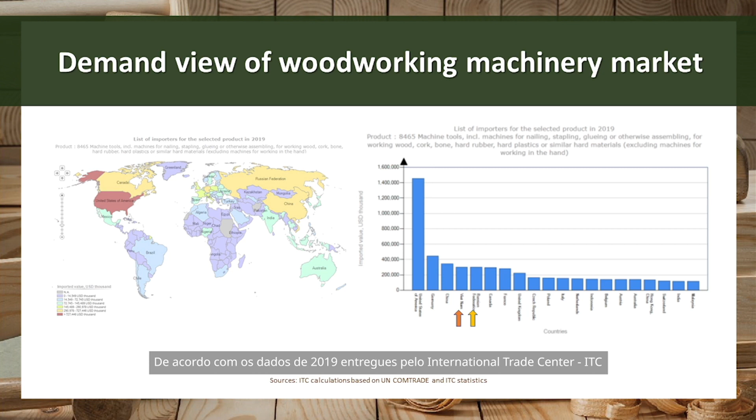Since Wood Taiwan is dedicated to promoting global woodworking machinery, it is very important to know who buys machines. According to the International Trade Center, ITC's data in 2019, USA bought more than $1.4 billion, standing as the world's largest importer, followed by Germany and China. Emerging markets Vietnam and Russia were ranked number 4 and number 5.

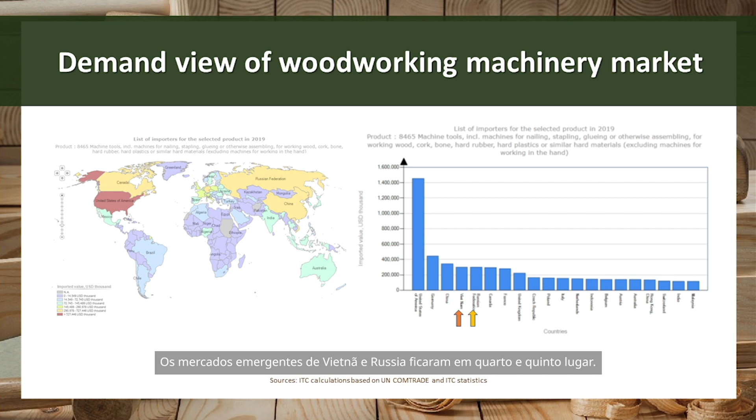On the other hand, when we examine the supplying side, Germany pops up to take the lead with exports of $2 billion, followed by China and Italy. And Taiwan was the number 4 supplier of worldwide woodworking machinery. In 2020, Taiwan shipped $700 million more.

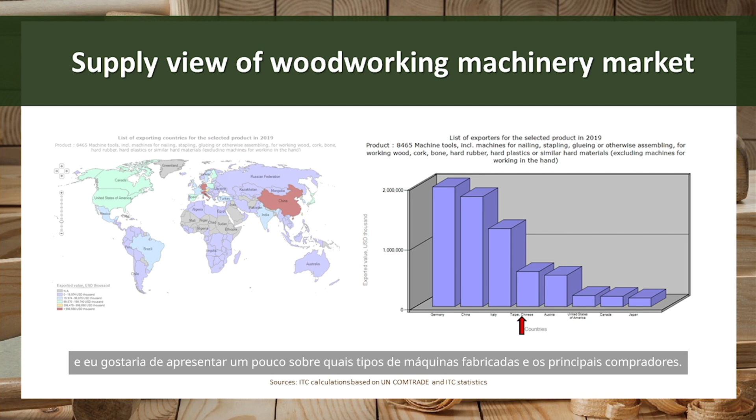You might ask, what makes us different from others? The main reason is we tailor machines according to customers' needs. Taiwan's machines enjoy a good reputation of high quality, reliability, and quick response to customers' demands after their sales.

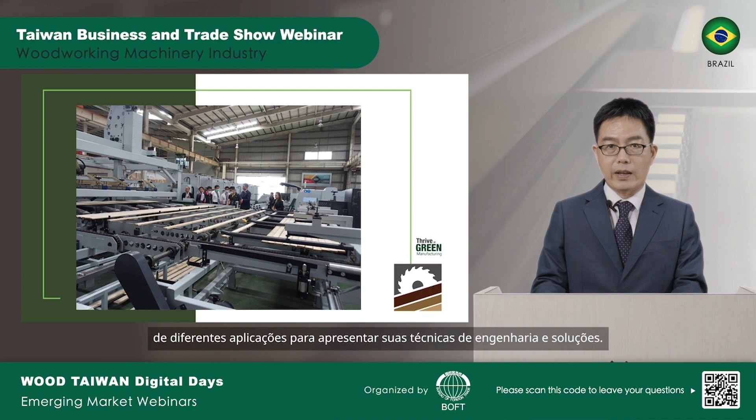In this webinar series, we've invited heavyweight machine makers from different applications, presenting their engineering crafts and solutions. Wood Taiwan is a perfect venue for you to explore the cutting-edge machines.

In the last exhibition 3 years ago, we had 167 exhibitors using 1,076 booths, showcasing their best products and know-hows, attracted more than 900 buyers from the globe and nearly 5,300 domestic professionals to network with their counterparts.

The coming Wood Taiwan will be staged at TaiNEX 1. We look forward to your visit next year in Taipei. Thank you.

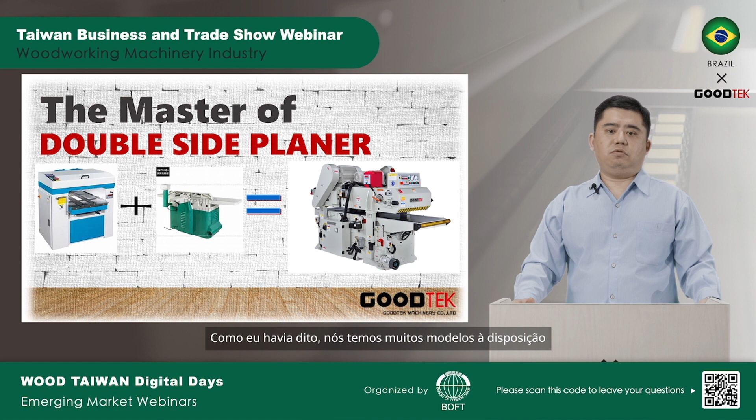Like I told you, we have many models for you to choose. Now I will introduce our full models for you. Those you can see, that is our 400 models.

The special one is the medium, GT400S. It can plane only 100 millimeters length of wood. Besides, it has a synchronized conveyor table. This equipment is better for the operator to feed the short material. Now this equipment is optional for all models, not only for GT400S. More and more customers prefer this function because it's convenient.

GT400B is our standard model. It can plane 250 millimeters length of wood. If you are first time to use a double-side planer, GT400B can be your best choice.

You can see those are 610 and 635 series models. The special one is the medium, HS635ARD. It is our high-speed model. The normal feeding speed is 24 meters per minute, but HS635ARD can go up to 40.

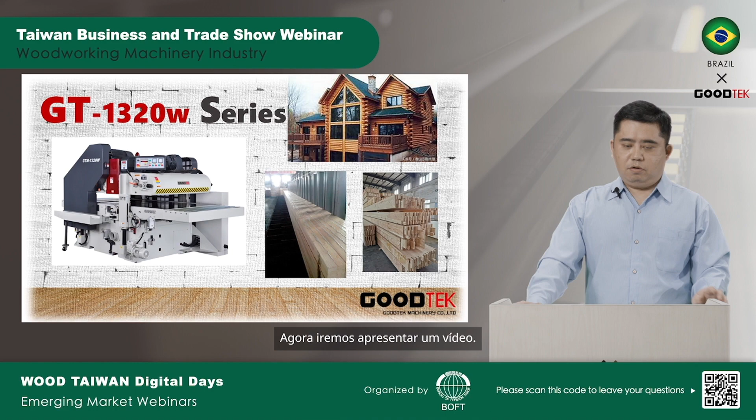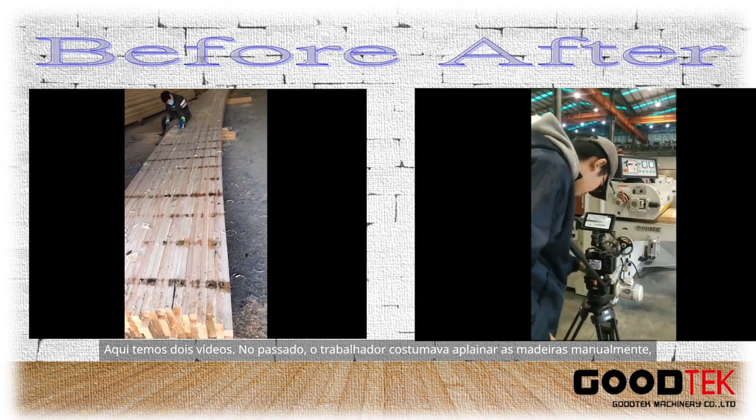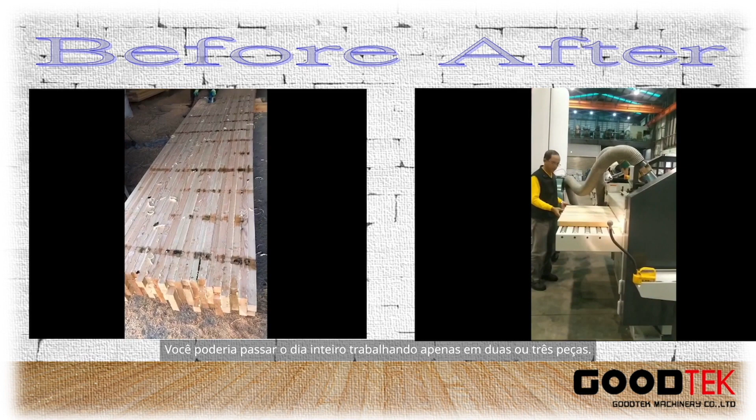You can see those are two videos. In the past, the worker usually planed a huge piece of wood manually. It costs a lot of time, human labor, and efficiency. Perhaps you would spend one day just to produce 2 or 3 pieces, and the quality of the work is not good either.

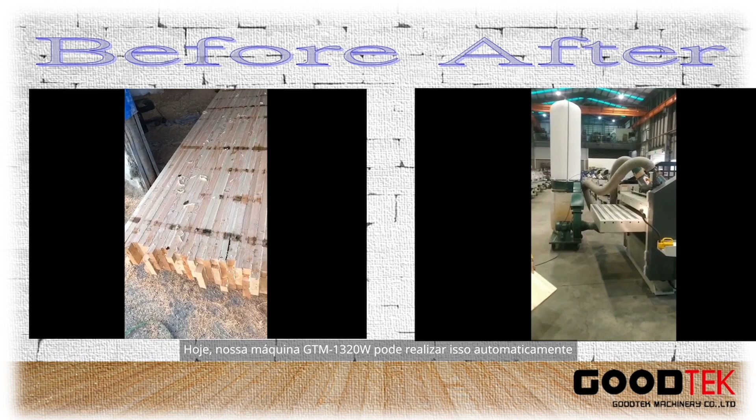Now our GTM-1320W can do this job automatically. You don't need to spend much time and human labor in the process. It saves more cost and makes more profit.

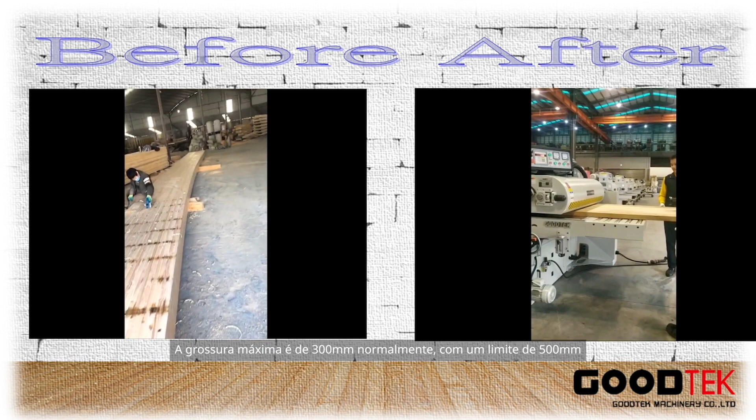For this model, the maximum width is 1,320 millimeters. The maximum thickness is 300 millimeters as standard, but we can go up to 500 as an option.

Now I am very proud to show you the demonstration video about our company and what our double-side planer can do for you. You can see our company is located in Taichung City, the center of Taiwan.

You can see this is our office. We have 30 employees in our office, our company.

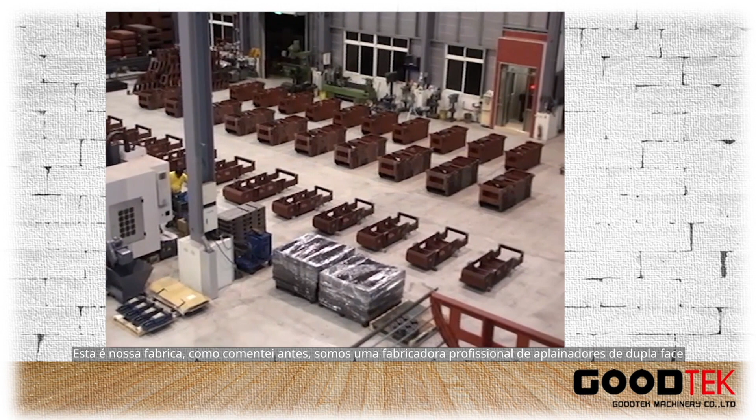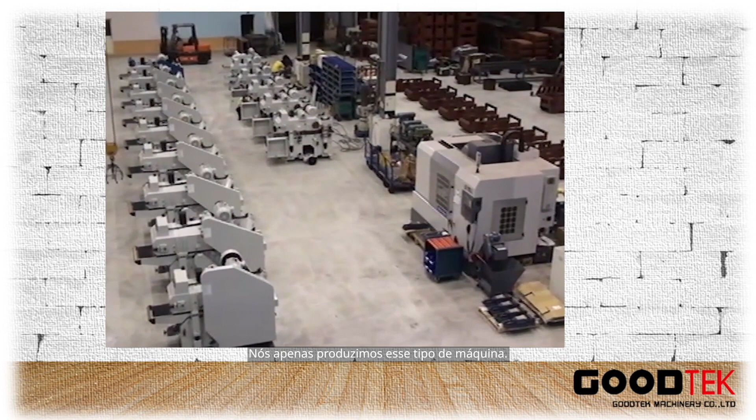You can see this is our factory. I told you before, we are a professional manufacturer for double-side planers, so we only produce this kind of machine, no other machines. We can produce 400 to 500 machines a year.

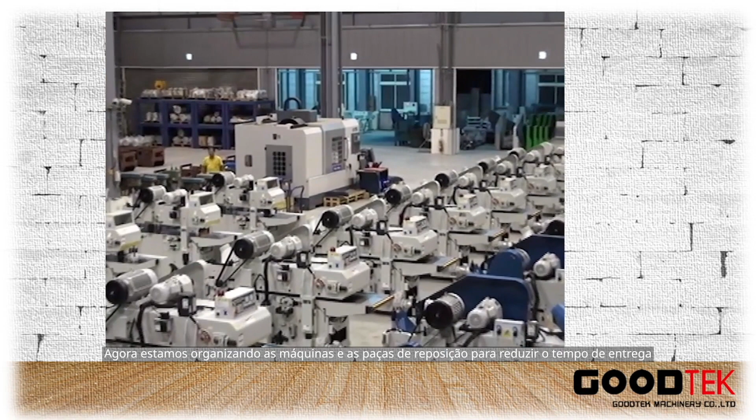Now we are trying to organize our machine and spare parts inventory. We try to reduce the delivery time of our products. The lead time for the machine is only 20 days, and for spare parts, it's only 1 day.

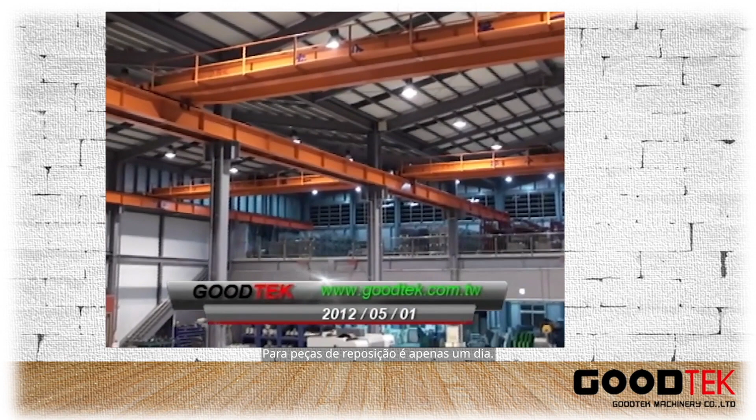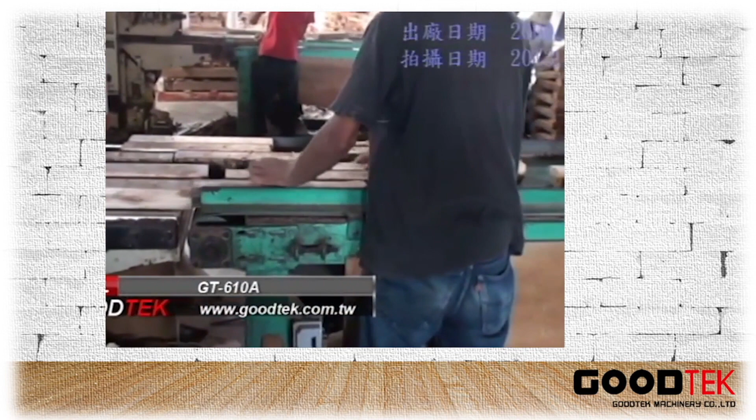Okay, you can see this is a factory in Indonesia. The model is GT-610A.

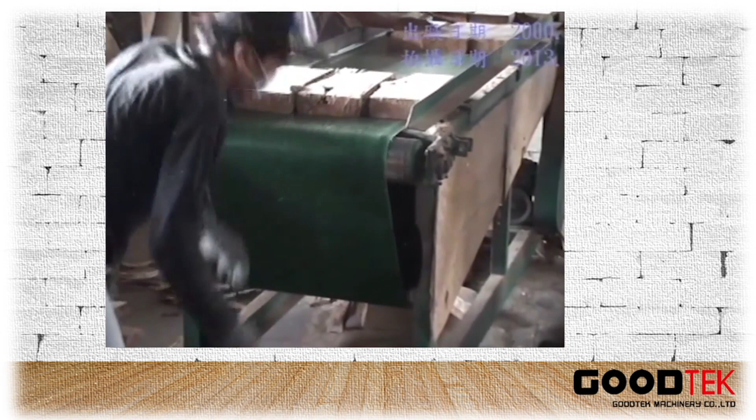You can see this factory has more than 10 machines of Goodtek planer. Their production is very huge. For the double-side planer, you can put several pieces in one pass.

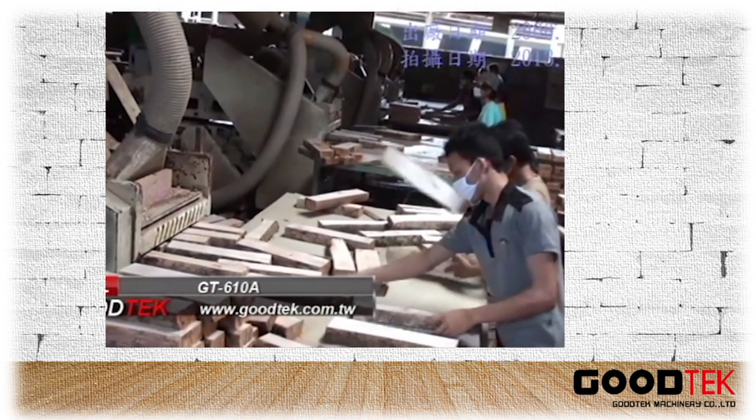Okay, you can see this is the final product.

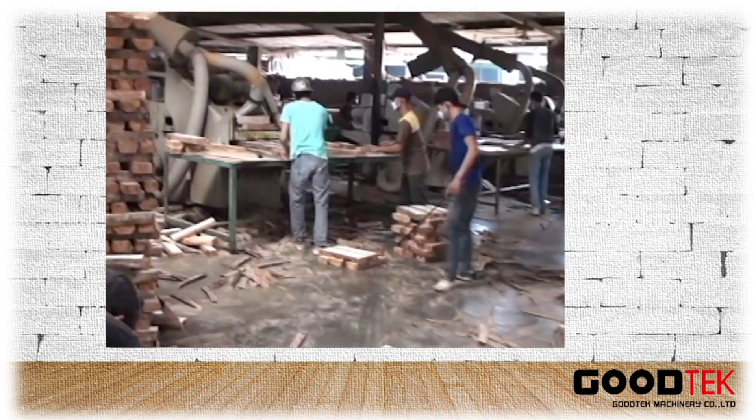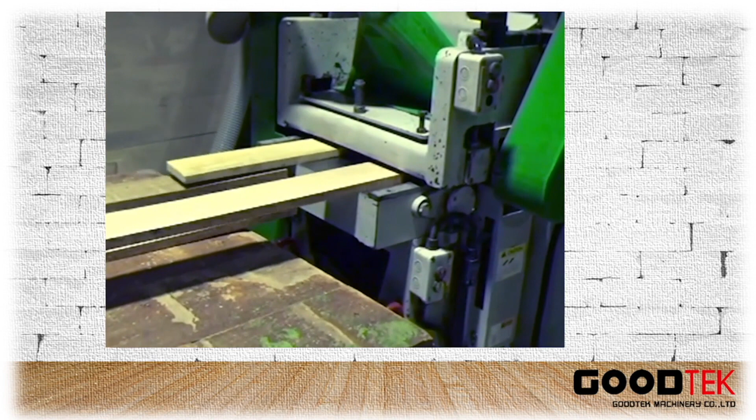Okay, this factory is in Thailand. Now it's planing the top and bottom surface. Now it's planing the left and right surface.

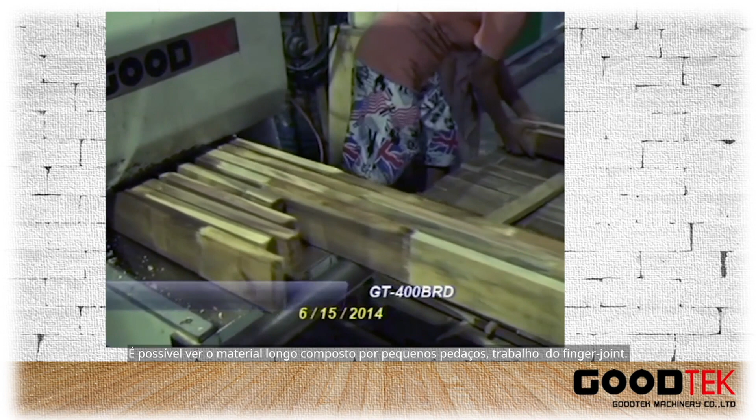You can see the raw material is composed of small pieces joined together by using a finger jointer machine.

Thank you for your time and watching. If you want to buy a double side planer, you can choose Goodtek Machinery. Thank you.

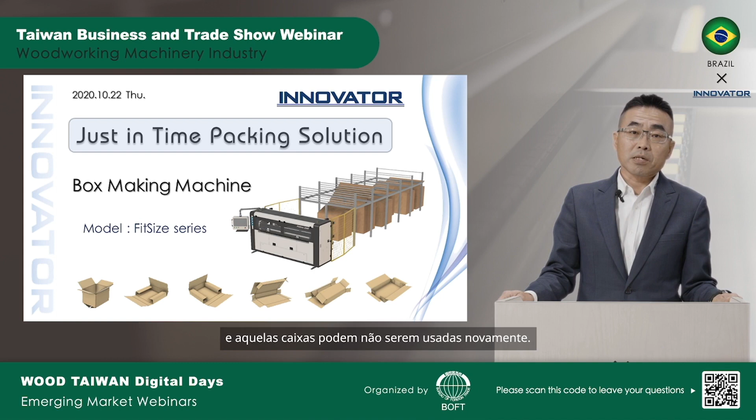So what is the just-in-time packing solution? Oftentimes when we visit customers, we see they have a lot of waste boxes in their warehouse, and those boxes may not be used again anymore. So the advantage we are trying to provide is that with these box making machines, we can make any size, any box style, at any time, in an easy and more efficient way.

And you will be able to stop wasting money and time on inventory boxes. In a way, you can also reduce the number of staff needed to check and locate these boxes as you need them.

We also can help you reduce the cost of fillers, like peanuts and air pillows, so you don't have to ship a lot of air when you do logistics on your trucks. So we can carry the content to the customer safe and sound by minimizing shipping cost.

And we also can help you lessen the shipping cost by reducing the necessary filler. As a result, it creates a better environment for our kids by fitting more boxes onto trucks and airplanes.

So considering all the benefits of our box machines, you are able to produce fit-size boxes in an easy and efficient way. So here I would like to show you videos which will help you understand how the machine works and how it can function.

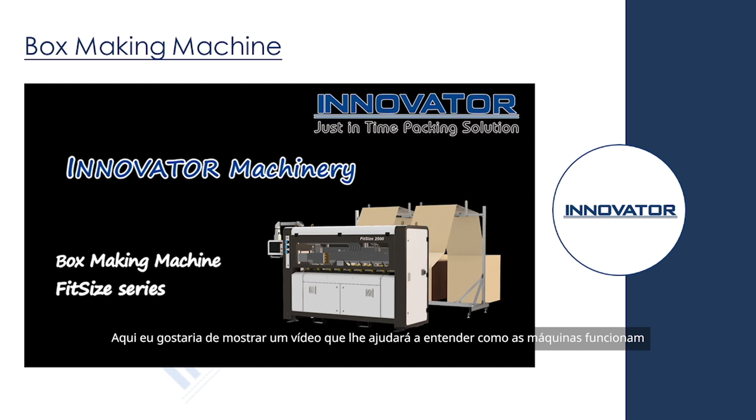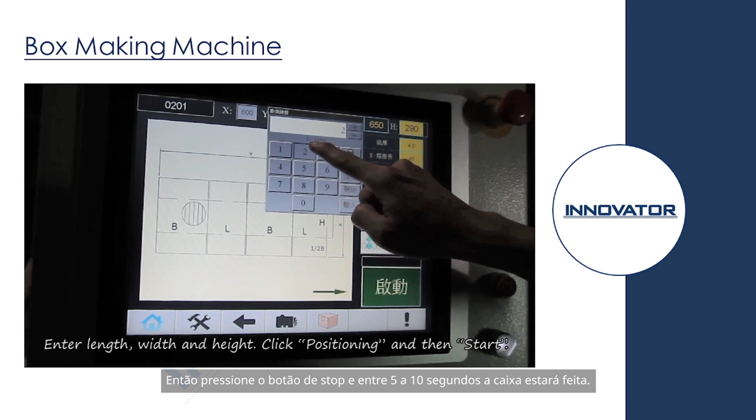So you can simply punch in the length, width, and height of the box you want to make. Then you just punch the start button, and within 5 to 10 seconds, the machine will make the boxes for you.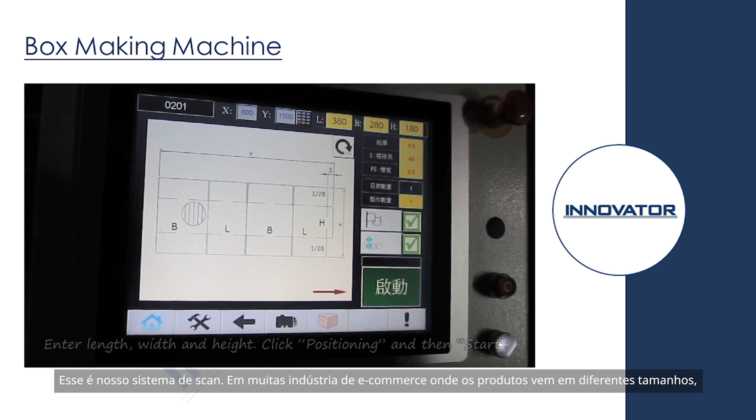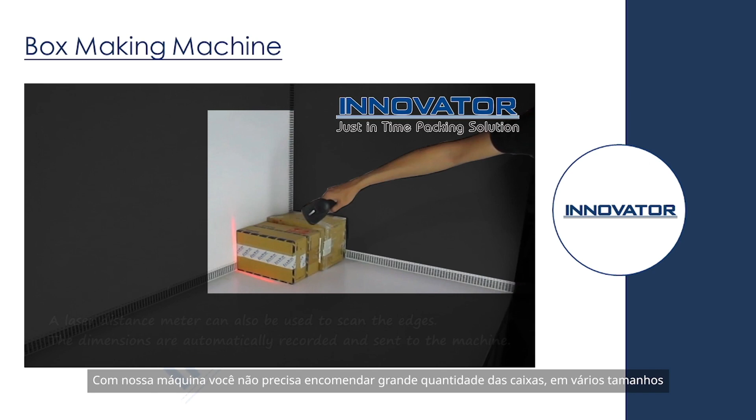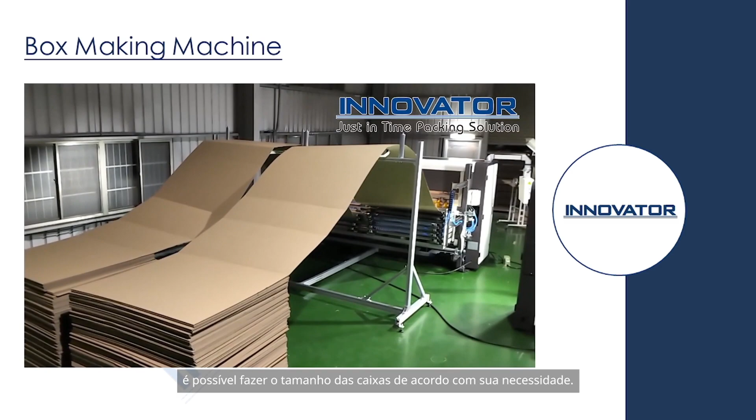This is our scanning measurement system. In a lot of e-commerce industries, where you want to pack contents that come in different sizes, you don't need to order a huge quantity of boxes. With our machines, you are able to make the box size just right to fit the content you are planning to ship. So let's get into a little more detail about the machines.

As you can see on the PowerPoint here, we have the infeed rollers and also the outfeed rollers. By standard, we are offering 1 crosswise cutting unit, 6 longitudinal cutting units, and the creasers.

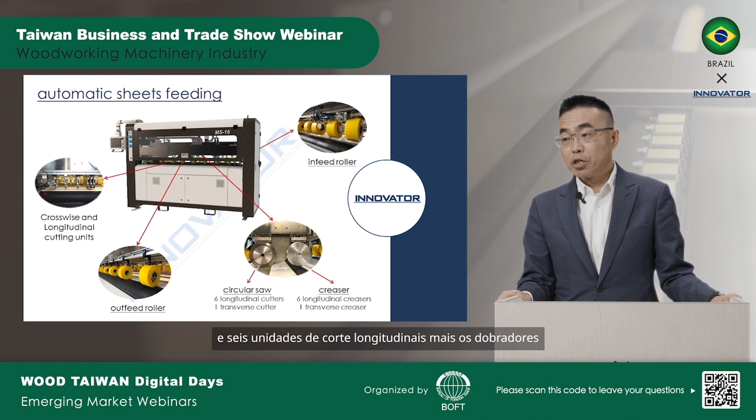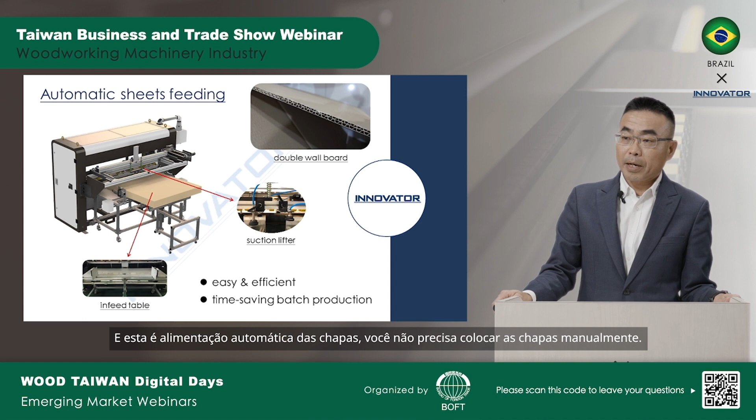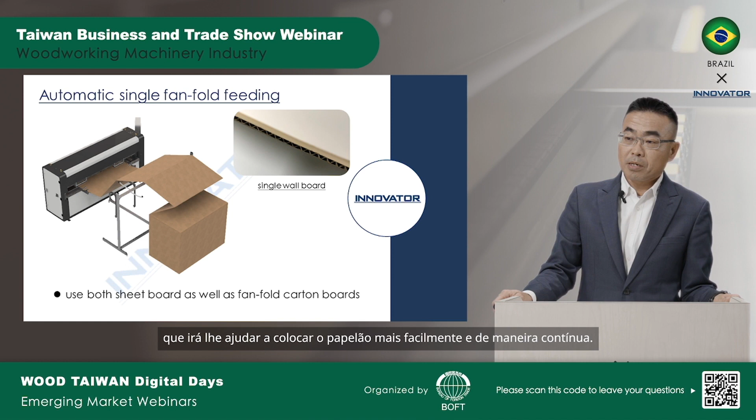This is the sheet feeding, automatic sheet feeding zone, and you don't have to feed the carton manually with your workers. You can also use what we call the fan-fold feeding system, which helps you feed the carton paper more easily and in a continuous way.

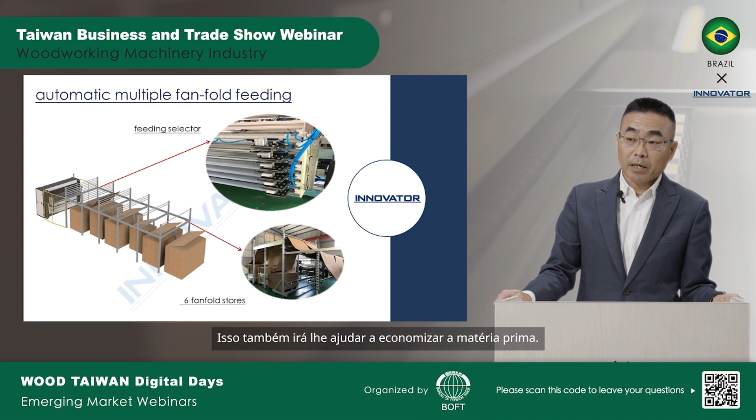You can also have what we call the side-by-side feeding system. You can have two different widths of corrugated cartons to maximize the yield of your raw materials. We can also do a maximum of 6 fanfold stores, and with our side-by-side feeding system, you can have a maximum of 12 different widths of corrugated raw materials. This will help you save a lot on your raw materials.

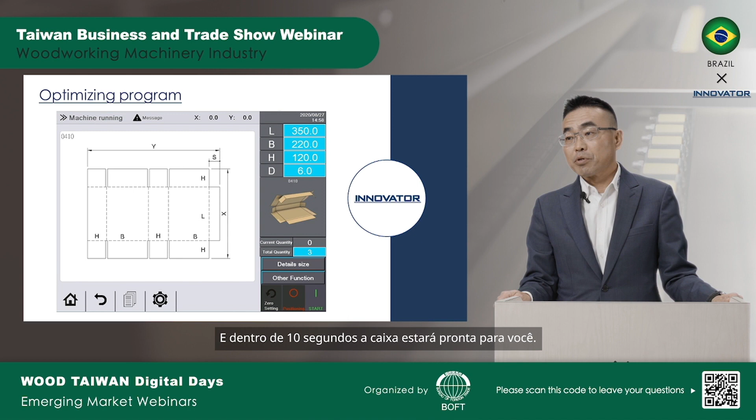So let's get into the program part of our machines. From the slides here, you can easily see there are several box styles you can choose from. Once you choose the box style, the next thing you have to do is punch in 3 numbers: the length, width, and height of your box. Within 10 seconds, the box is ready for you.

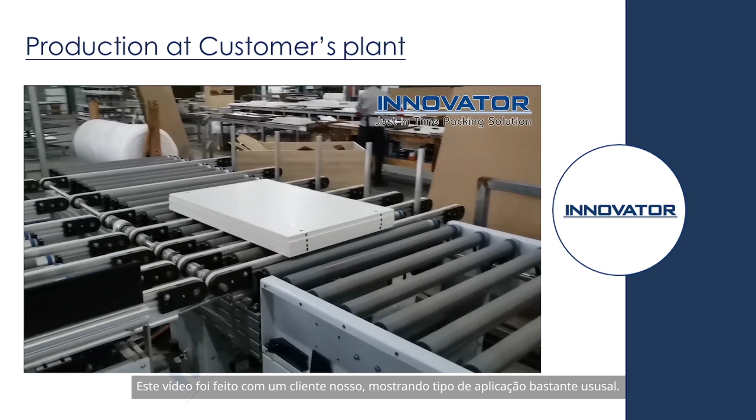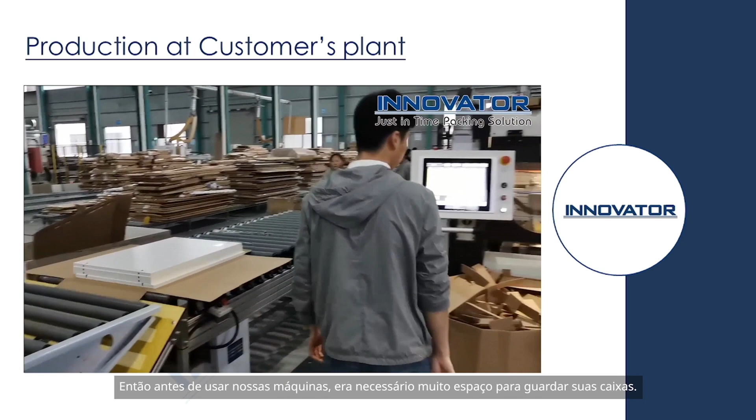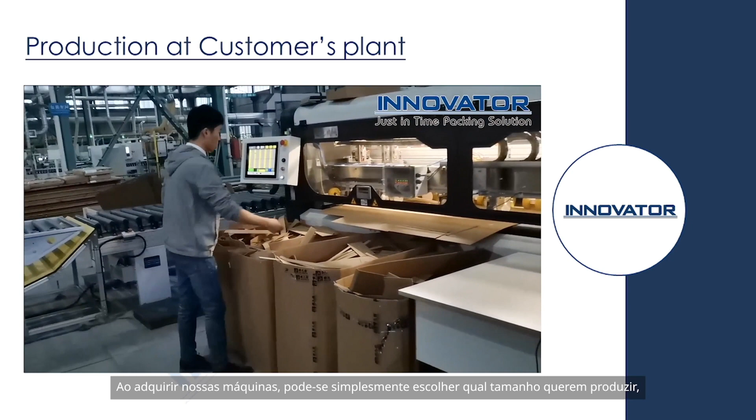This video was taken from one of our customers, typical panel furniture producers. Each panel they produce comes in a different size. Before using our machines, they needed a huge amount of space and had to order a huge quantity of boxes, which took up a lot of their warehouse space. Now, with our machines, they are able to pack whatever size panel they produce in a very easy and clean way.

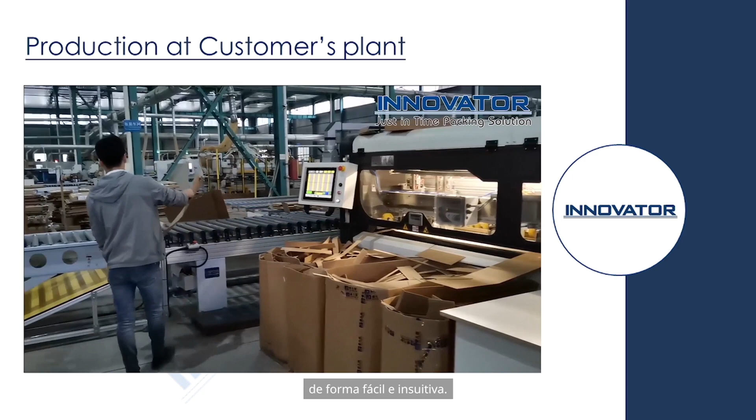The applications of this box-making machine can be various. It can be used by door manufacturers and for many different furniture packaging applications, like chairs or different sizes of couches and sofas. In this way, it will help you reduce shipping costs and help you manage your warehouse.

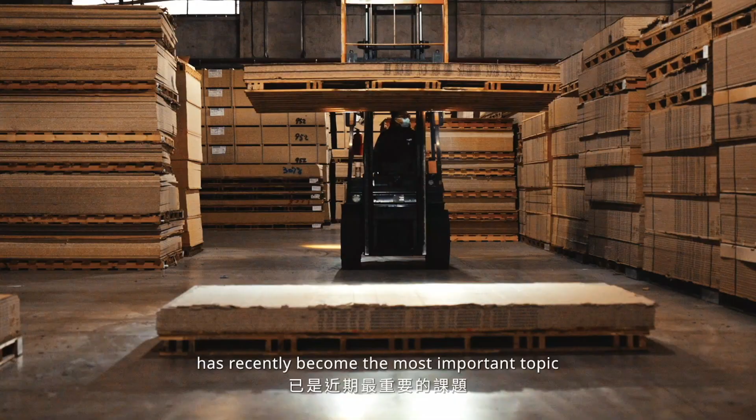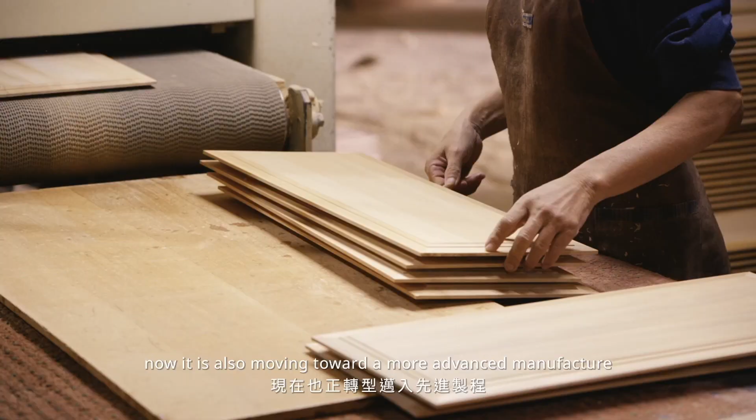Nature is the fundamental source for our human society and for all living beings. How to reach a balance and be able to live with our nature has recently become the most important topic. Same for the woodworking industry, serving as the initial material in industrialization. Now, it is also moving toward a more advanced manufacture and aim for an efficient utilization of wood, higher precision with less waste, and a greener production.

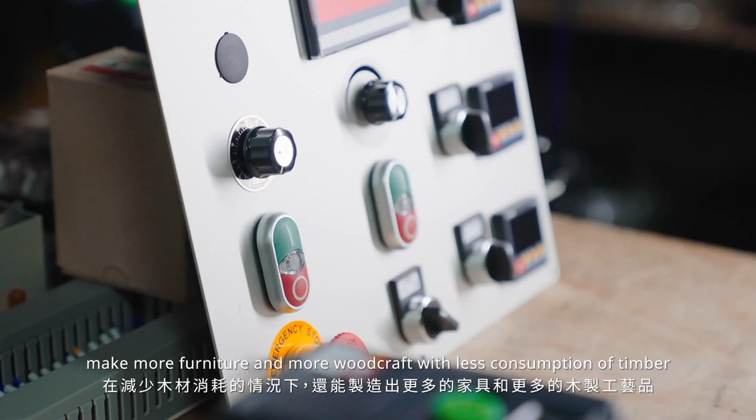We are trying to develop a new technology to help our customer make more furniture and more woodcraft with less consumption of timber. So only a smart machine can solve the problem. We would like to make the machine different from the global market.

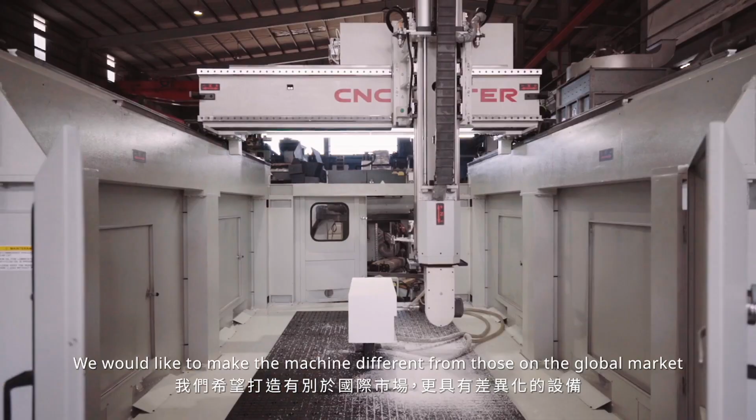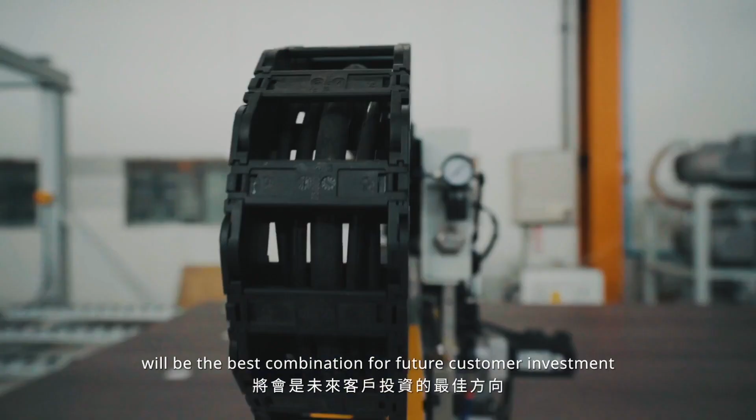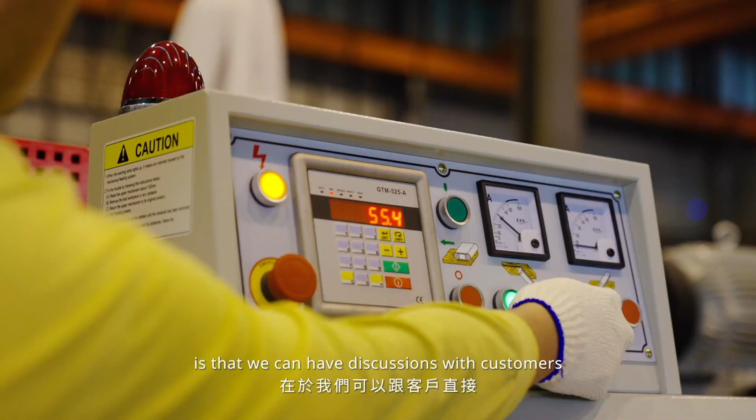From the perspective of the current market trends, a flexible capability of the production system will be the best combination for the future customer investment. It's a good opportunity for all customers to see different kinds of woodworking machines in the Wood Taiwan show. We think the advantage of physical exhibitions is that we can have discussions with customers about their needs and requirements.

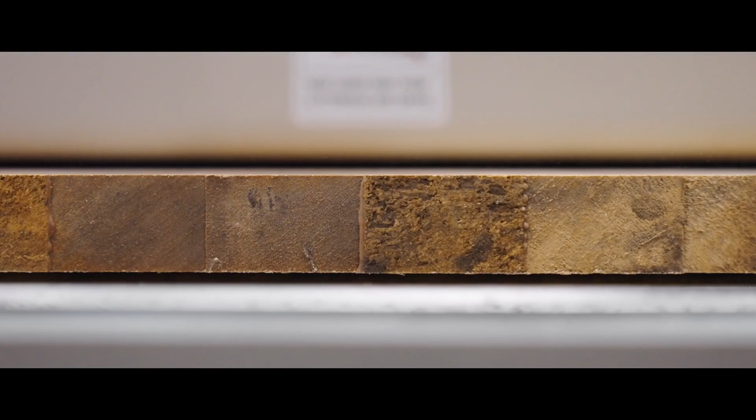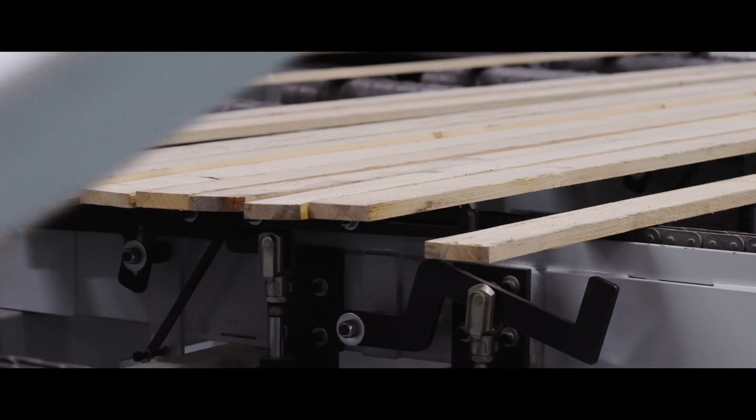Taiwanese manufacturing is very strong on the product. Taiwanese companies focus on manufacturing the machine; they lack professional skill in some areas, so whenever a customer has a special need, we can modify it for them. This is also our advantage.

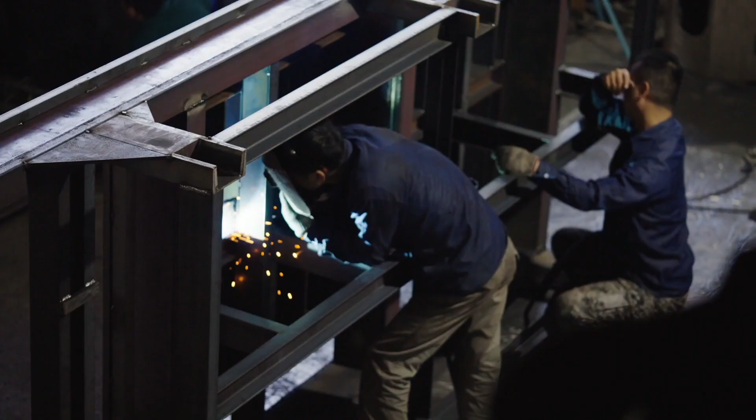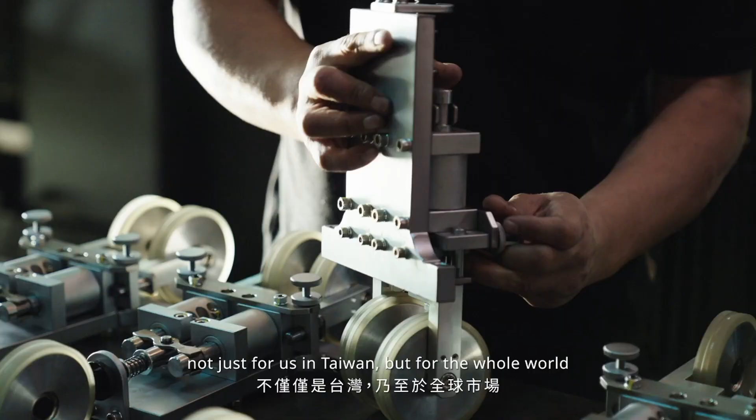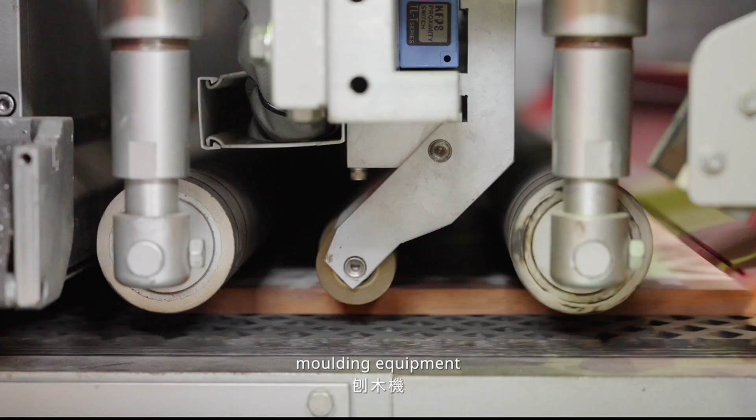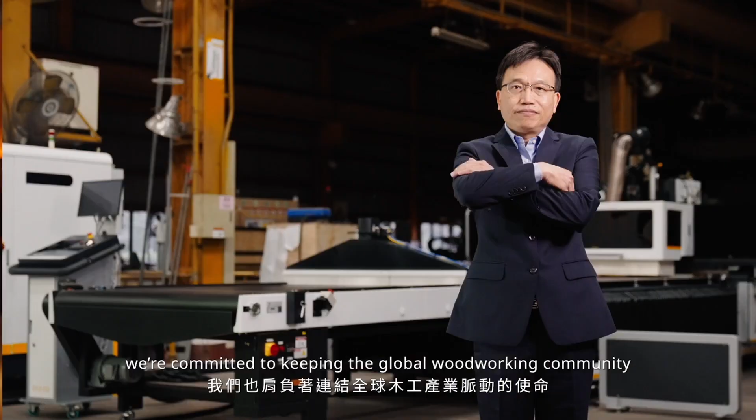2020 has been a challenging year, and the woodworking industry, not just for us in Taiwan but for the whole world, continues to adapt in 2021. Ranking as the fourth largest exporter for global woodworking machinery, Taiwan has been a major producer of reliable sawing machines, moulding equipment, sanding machines, jointers, and tenoning machines. At Wood Taiwan, we are committed to keeping the global woodworking community connected and informed, with the ultimate ambition to shape the future of green manufacturing.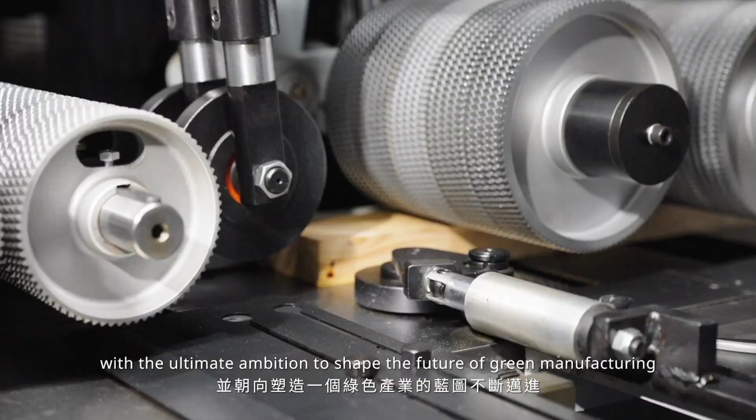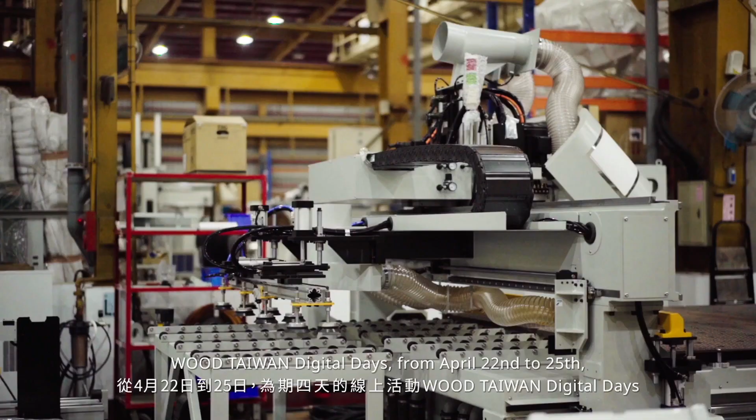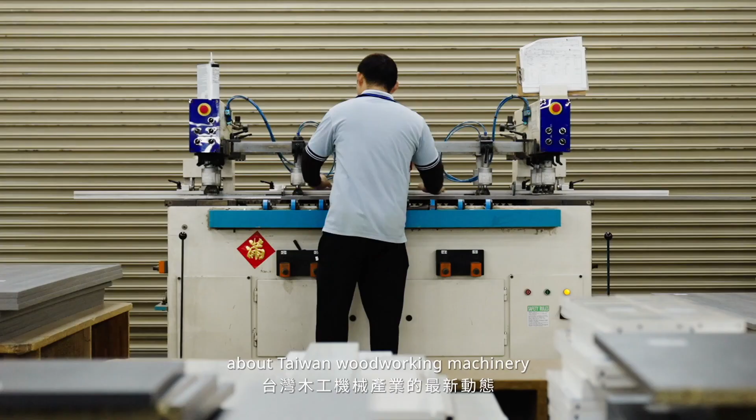Wood Taiwan 2021 has been rescheduled to 2022 due to the pandemic. Wood Taiwan Digital Days from April 22nd to 25th will keep you updated on the latest developments about Taiwan woodworking machinery. The online activities will include Wood Discover factory tours to leading exhibitors, webinars for hot product launches and market opportunities, and online business matching meetings.

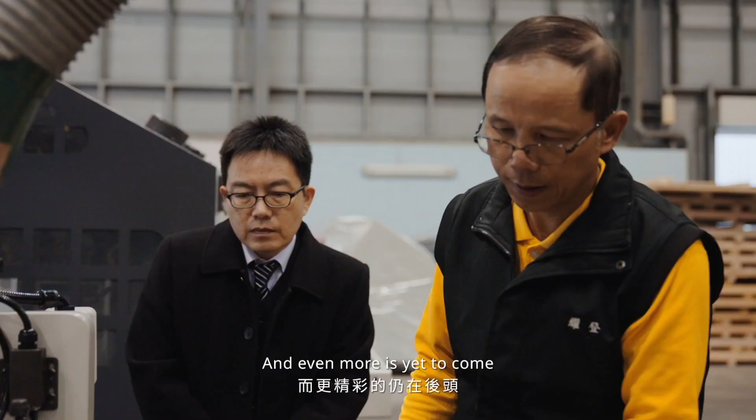And even more is yet to come, with more than 150 exhibitors expected both online and at the showground in 2022. Wood Taiwan will be one of the great opportunities to meet our leading Taiwanese exhibitors, both online and later at the showground in 2022.